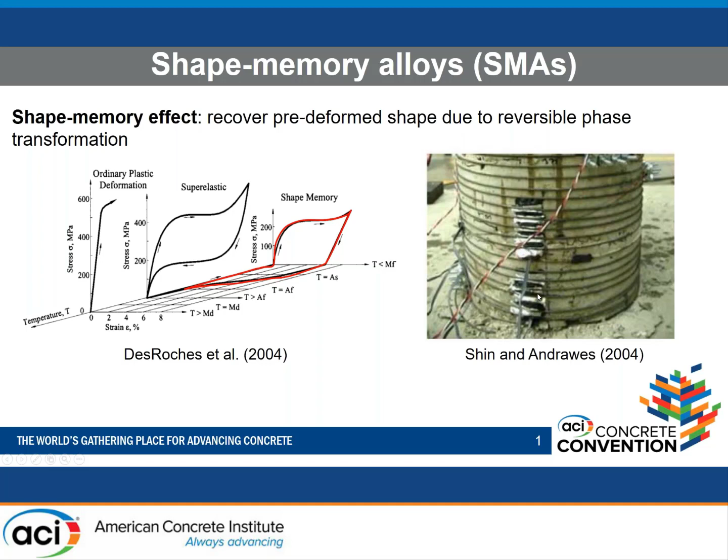What I'm showing here is a study by Shin and Andrawes, and they used nickel titanium-based shape memory alloys in order to confine concrete using the shape memory effect that I just mentioned. But the problem with this material is that it's very expensive, and it might not be practical for structural engineering applications if it needs to be used at a larger scale.

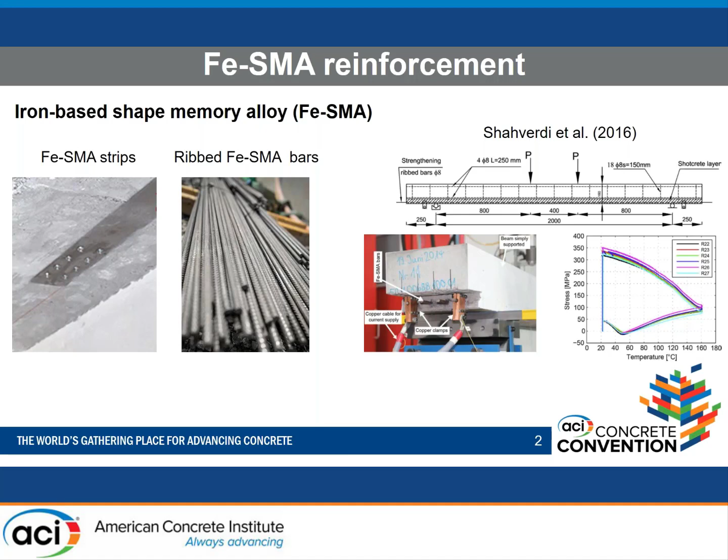And recently, a new material was developed. It's iron-based. It's cheaper. It doesn't have the superelastic property of nickel titanium-based alloys, but it still has the shape memory effect. As we can see here, we have them in strips. We have them in ribbed bars, similar to conventional steel rebars. Here we have a study about strengthening a beam using those bars. They provided a shotcrete layer, embedded those bars, and used heating activation to induce a pre-stressing force in the beam, and that resulted in improving the cracking moment capacity and the performance of the beam. With that being said, this material is being used more and more, and different researchers are investigating it. For that reason, it's important to understand the bond behavior of this material.

And of course, as we all know, bond has been extensively studied for conventional steel rebars, but this is a different material for different reasons. First of all, it has different mechanical properties, and also due to the activation temperature needed to activate the shape memory effect, there might be a possible deterioration of the material while activating the bars. This was already shown today by Professor Sharma, who gave the first presentation, and he showed us that even for conventional steel rebars, there is a bond reduction as the temperature increases.

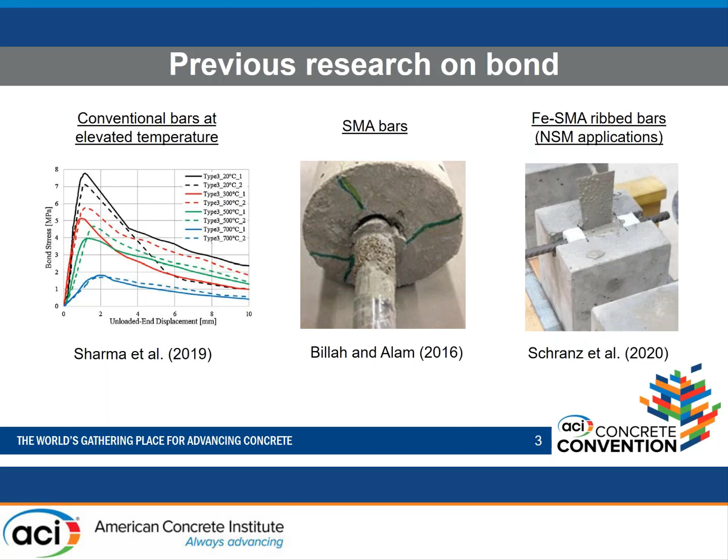As for shape memory alloys, Professor Billah just presented his study about nickel titanium-based shape memory alloys, and we just saw his results. There's only one study about ribbed shape memory alloy bars, which will be used in this study, and those tests were done for near surface mounted application. So to this date, there is no study about the bond behavior of ribbed iron-based shape memory alloy bars, and this is what I will be presenting today.

So the objective of this study is to study the performance of ribbed shape memory alloy bars for both splitting and pull-out types of failure, and then due to the possible effect of the activation temperature, we are investigating different temperature activations in order to see the influence of this temperature on the bond behavior and the bond strength.

And finally, we will estimate the transfer lengths in prestressing concrete applications, because this material can be used for strengthening, can be used for concrete overlays, and then it's important for practical applications to get an idea about the transfer lengths for that material.

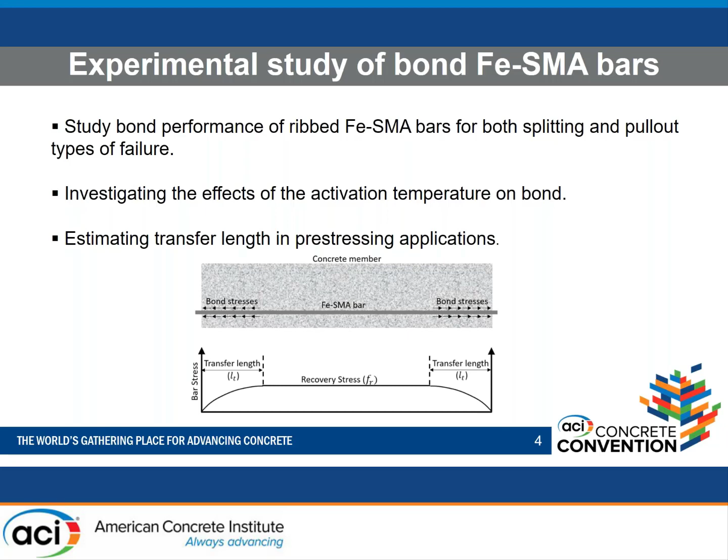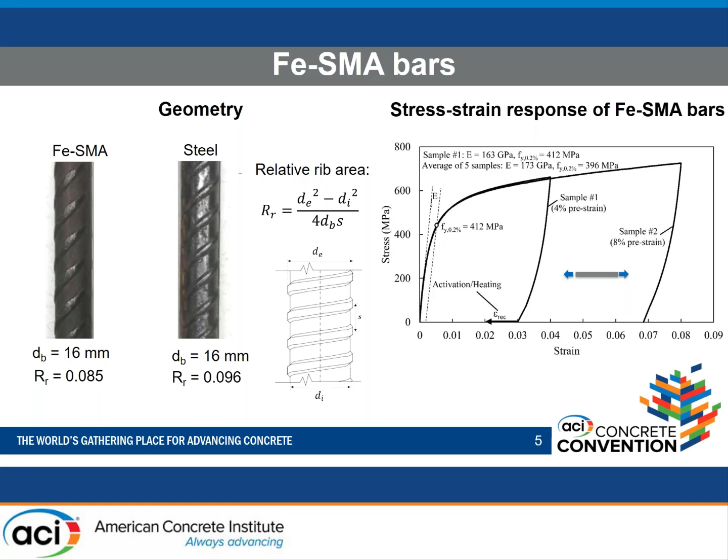Here I'm showing the stress strain plots for the SMA bars for 4% pre-strain and for 8% pre-strain. And here we are showing the strain recovered upon heat activation. We were able to get 1% strain recovery. Here you can see the yield strength of the material and the modulus of elasticity. This is very close to conventional steel, while the modulus of elasticity is smaller than conventional steel. This corresponds to around 24,000 KSI. So this is the material, and now these are the specimens.

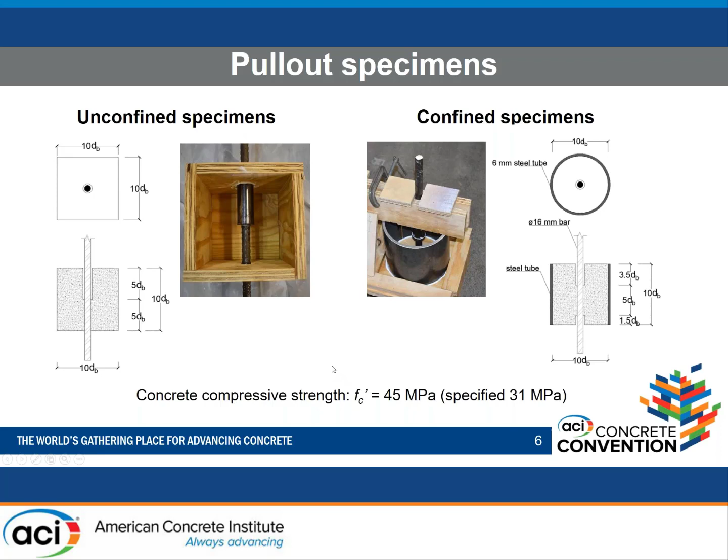So for the different parameters investigated in this study, we did 9 series of pull-out specimens with SMA bars and steel bars, again, iron-based, of course. We had confined specimens, which we wanted to fail by pull-out, and unconfined specimens, which we wanted to fail by splitting. Since the temperature effect is very important, we considered also the activation temperature effect. We considered no activation temperature at all to understand the fundamentals of the bond properties of this bar. And then we considered different temperatures which were reported in the literature for this specific type of bars.

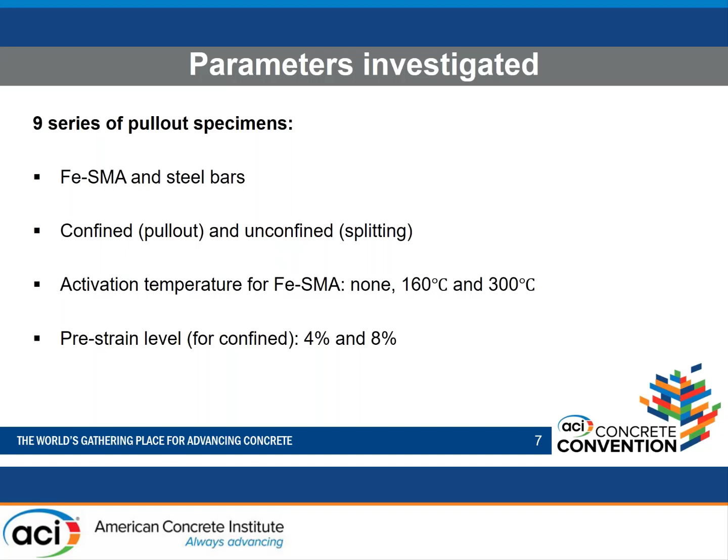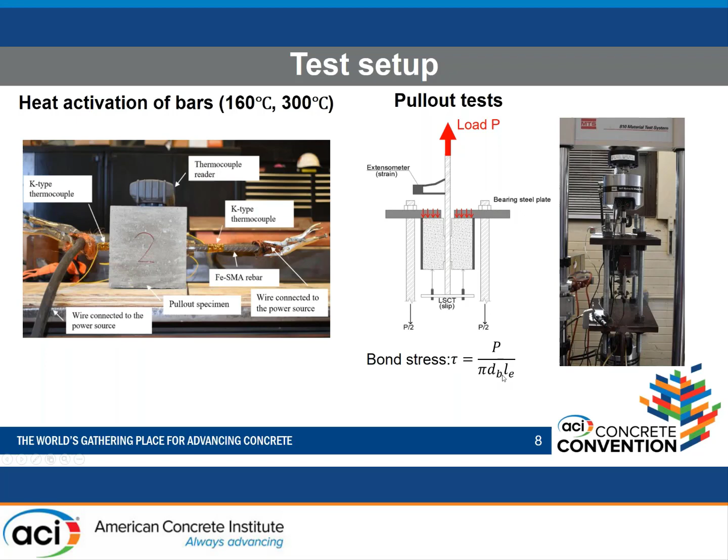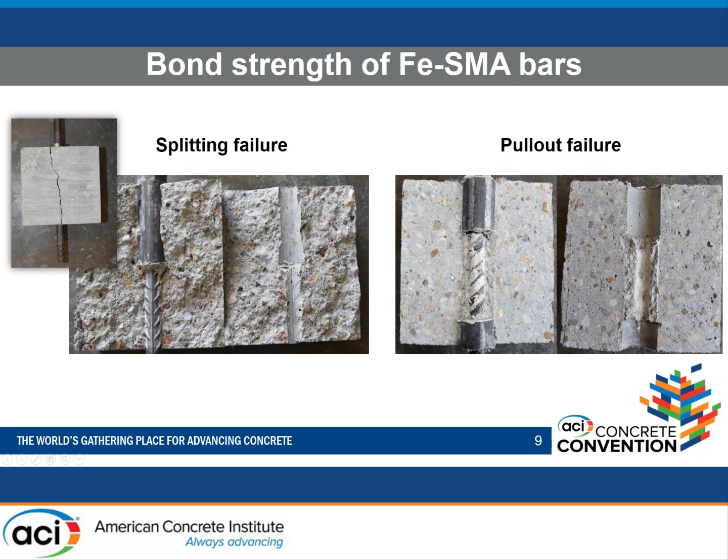For the pull-out failure, obviously, we needed to cut the specimen in order to see what happened inside. And clearly, you can see that the concrete between the ribs has been sheared off. Like here we have a smooth surface as compared to this surface, and we have concrete in between the ribs of the rebar.

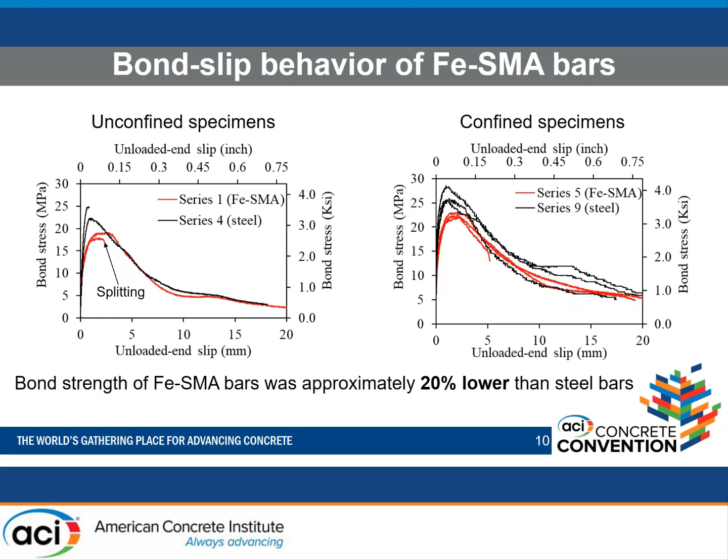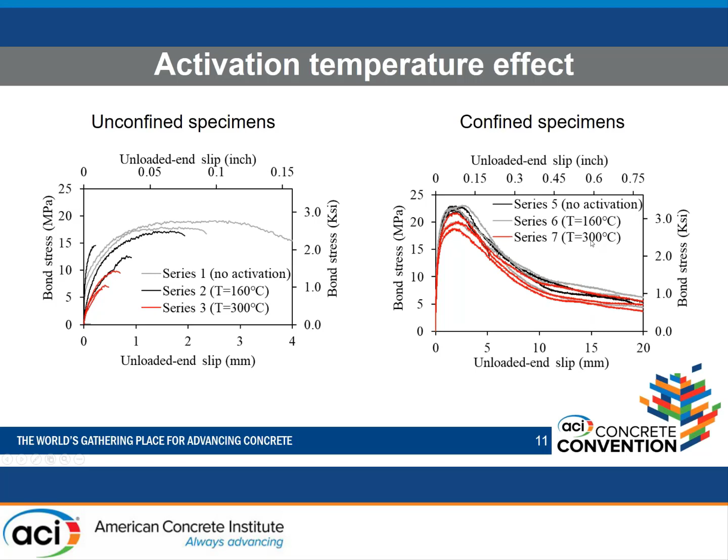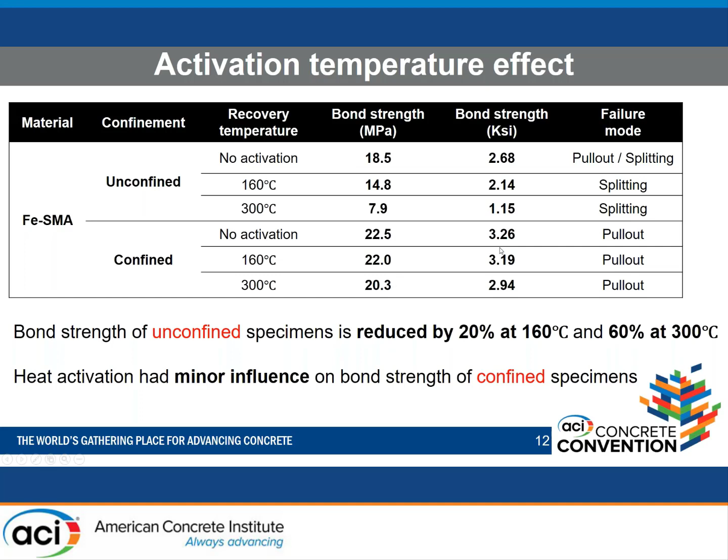Just to make it clearer for you, I'm summarizing the results in a table here. So SMA bars with unconfined, we have huge reduction in bond strength from 18.5 megapascal to 7.9 megapascal. While if you look at the confined cases, you will see a very minor influence of the heat activation as the bond just reduced from 22.5 to 20.3 megapascal. And these are the numbers in KSI, if you prefer the KSI unit.

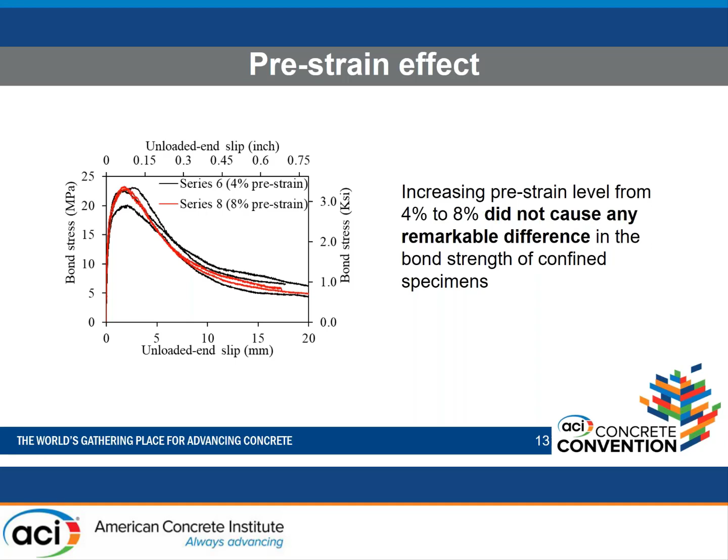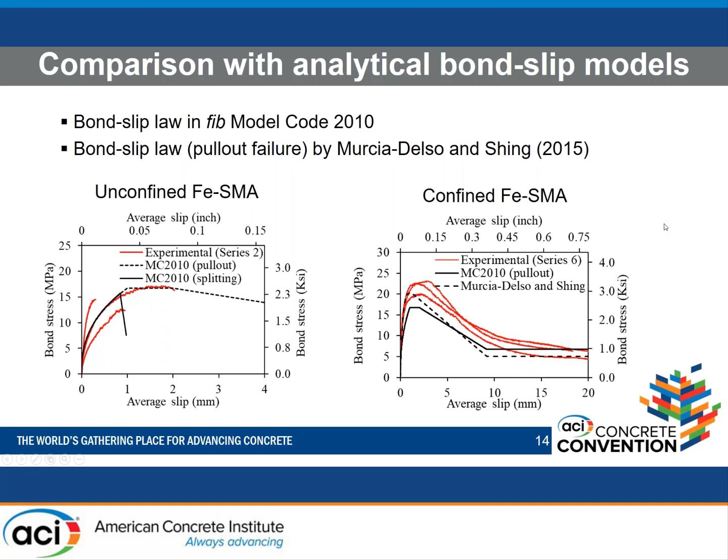And for the confined case, we see that SMA bars are giving higher bond strengths as compared to the models. Murcia-Delso and Shing model is giving closer result in terms of bond strengths, but in terms of the shape with the plateau of FIB, it's giving a better prediction. For the residual, we have very good predictions for both models. We're very close to the experimental results.

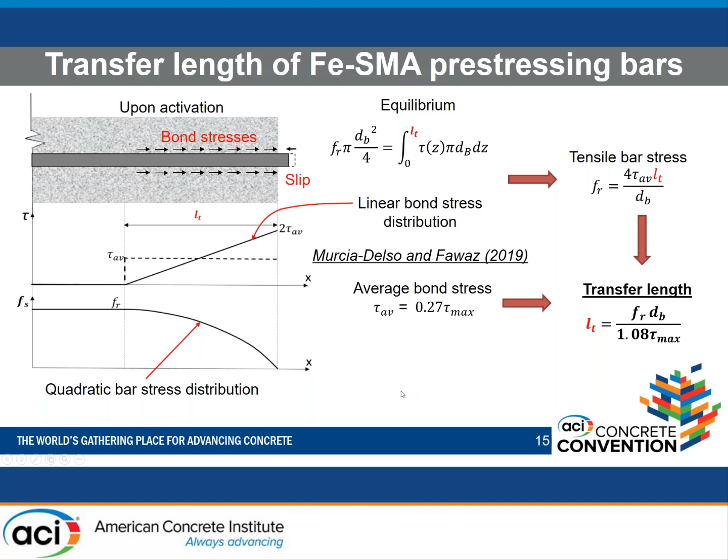And with the same model, it was recommended by Murcia-Delso and Fawaz that the tau average is 0.27 tau max. Plugging the tau average in this equation, we get a transfer length equation, which is a function of the target stress, the bar diameter, and the maximum bond stress of these rebars. Here, by the way, I'm showing the bar stress distribution, and based on a linear bond stress distribution, we get a quadratic bar stress distribution. So now with this transfer length expression, we wanted to get an idea about the transfer lengths for the SMA bars which were used for this study.

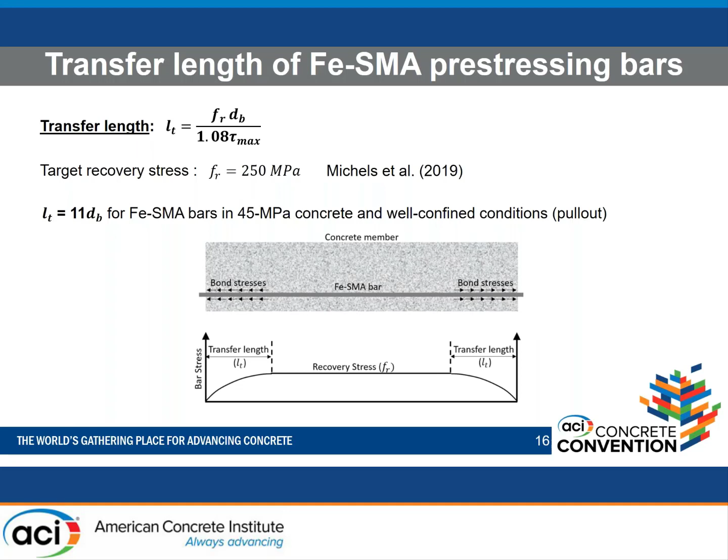And I'm using here a target recovery stress of 250 megapascal, which was recommended by Michels et al. for this specific bar. We got a transfer length of 11 bar diameters for a 45 MPa concrete. This is, of course, for well-confined concrete. And of course, this is not a design value. This is an estimation, a minimum requirement, based on this specific bar and this specific material. If we want to expand later for design recommendations, different bar diameters will be chosen, and also factors of safety have to be taken into consideration.

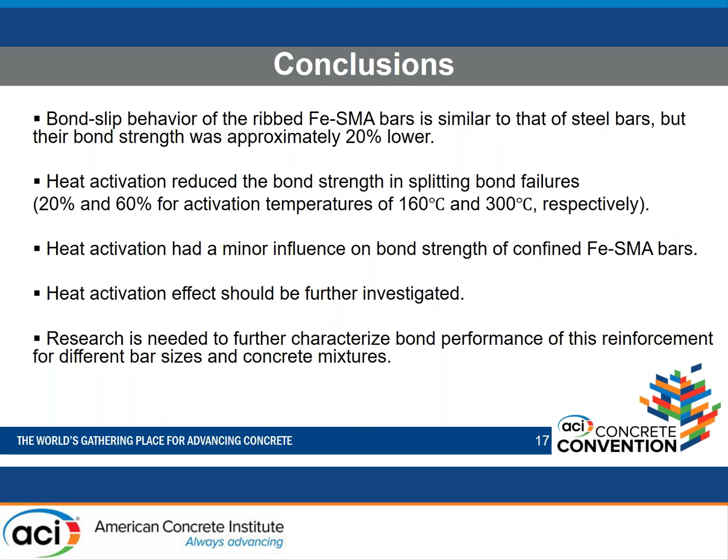So to wrap up, the bond slip behavior of ribbed iron-based SMA bars was similar to steel bars. The bond strength, however, was 20% lower. For the heat activation influence, we had major influence for unconfined specimens that reached 60% when the activation temperature is 300 C, while for confined specimens, we don't have that influence. They showed very similar behavior. And for that reason, the heat activation effect should be further investigated later. Also, research is needed to further characterize the bond performance for different bar sizes. Again, we used the 16 millimeter bar here. We need to check other bars, and different concrete mixtures.